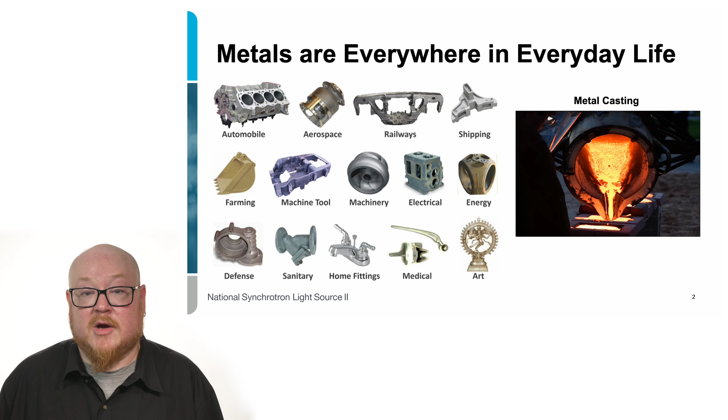Nowadays, we can do much more complex shaping and forming using the process of additive manufacturing, which is more commonly known as 3D printing. So you can form very complicated and very specific shapes and sizes of metal products.

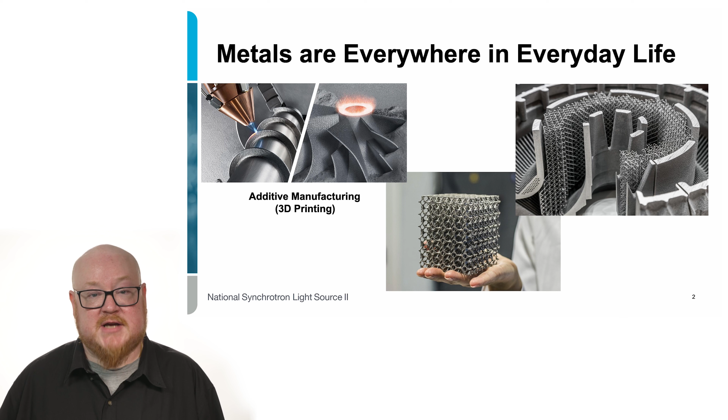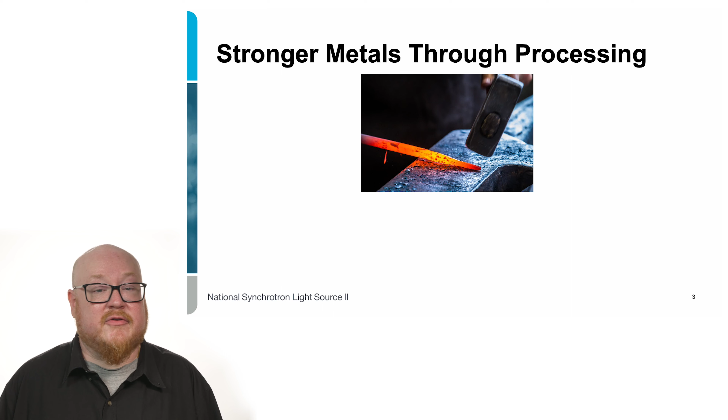But sometimes we want metals that are stronger or fit a particular purpose, and in this case, we need to do some processing to the metals. One of the most common processes for metals that people would be familiar with is forging. The examples go far back in time to the blacksmiths that used to make nails, spikes, and horseshoes and things like that. They're also used in very industrial processes today, which you can see at the bottom left here, where we're forming a large building ballast that's actually going to support the weight of a large skyscraper.

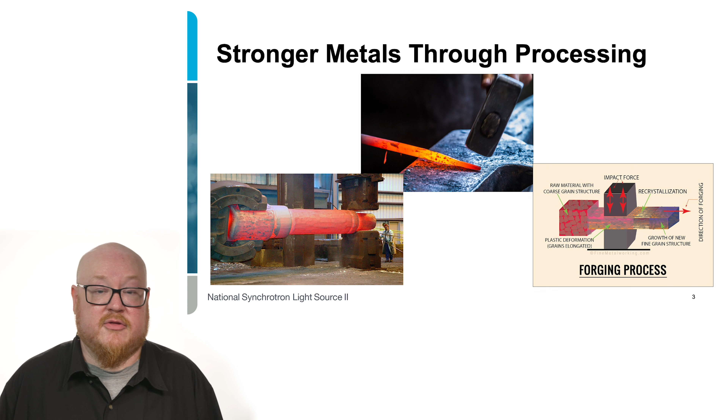The process of forging basically takes your raw hot metal material and has an impact force that not only shapes it, but also works to recrystallize the material and strengthen it in a particular direction that is beneficial to what you want that metal to be able to do.

Obviously, it's very important that this process is optimized in order to be reproducible, because if we're going to form something like a nail, or in the case of a building ballast, you want to make sure that it has high strength, and you want to make sure that whatever you do to it, you can reproduce multiple times so that it's the same every time.

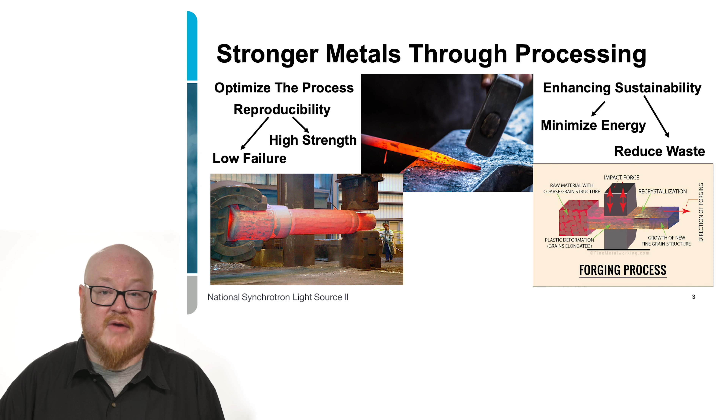You also want to make sure that it has a very low failure rate for the safety of the people who might be the occupants of that building. We also want to be able to enhance the sustainability of this forging process in order to minimize the amount of energy that it takes to make these pieces, and we also want to reduce the amount of waste that's produced during the processing of these metal pieces.

So the problem that we have is that we can see things before and after, but we can't observe what's going on while we're doing the forging process. We can't see the process itself, only the products after we've done the forging.

And this is where the synchrotron comes in. In particular, NSLS2 is an ideal place for studying this. The XPD, X-ray powder diffraction beamline at the NSLS2, has high flux, which means lots of X-rays, and those X-rays are very high energy. Both of these things are very important for being able to see through and study metal products.

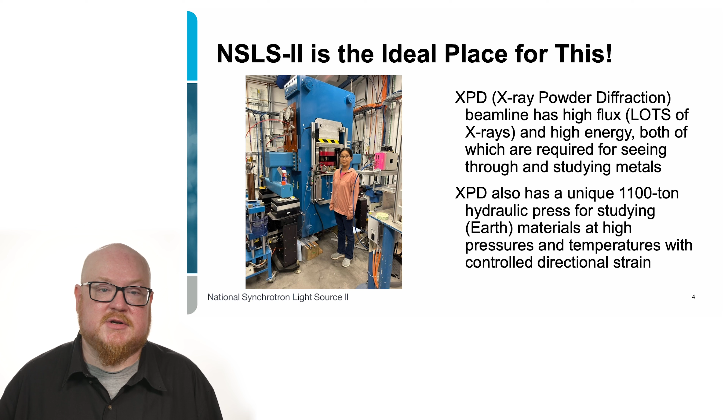In particular, XPD also has a unique 1,100-ton hydraulic press that's designed for studying materials, primarily earth materials, but many other materials as well, at high pressures and temperatures. And we can also control directional strain, which I'll get to in just a moment.

So to talk a little bit about pressure in relatable terms, pressure is basically just force divided by area. So if you have a block that's a particular weight and you lay it flat, it has less pressure exerted on the ground than if you stand it up on its end. It's the same force, but it's a different area, and that leads to a different pressure.

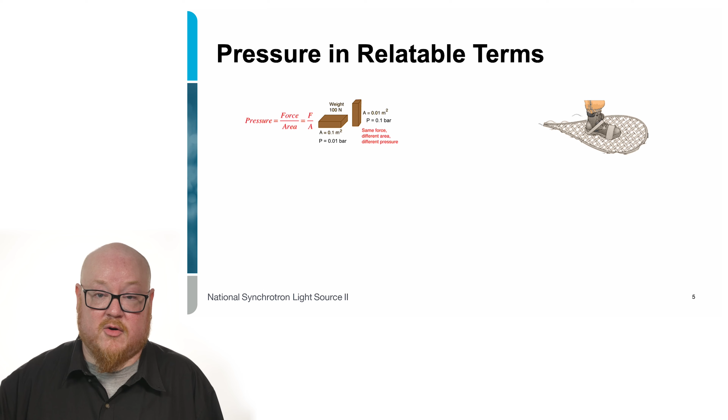That's the reason that we wear snowshoes in the winter, so that we can distribute our weight more evenly across the surface of the snow and we don't break through. On the other hand, a 100-pound woman in stiletto heels exerts 20 times more pressure on the ground than a 6,000-pound elephant. So it's the opposite of the snowshoe effect.

This is exactly why I stopped wearing stilettos. That and the difficulty in finding them in size 16 also played a role in that.

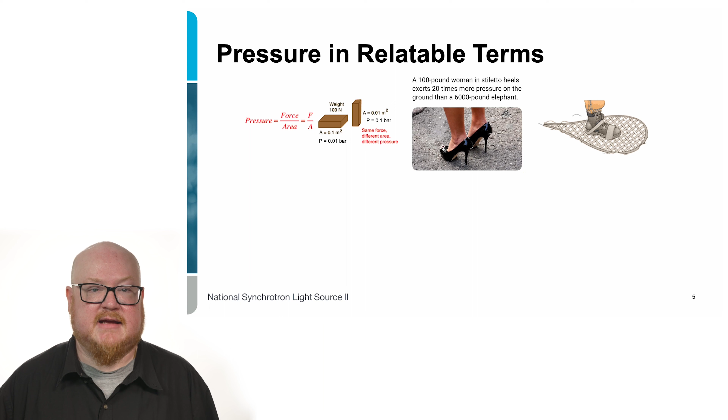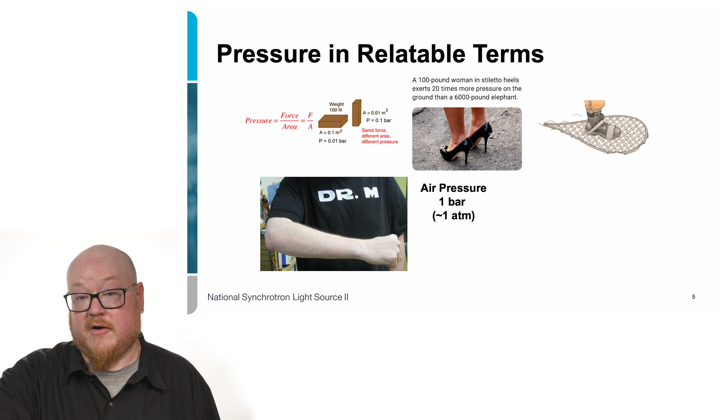But anyway, so to talk a little bit more about pressure, if you hold your arm out in front of you, the air pressure that you feel right now is 1 bar, about 1 atmosphere of pressure. And if you take your other hand and give your arm a tight squeeze, you're only adding less than half a bar of pressure.

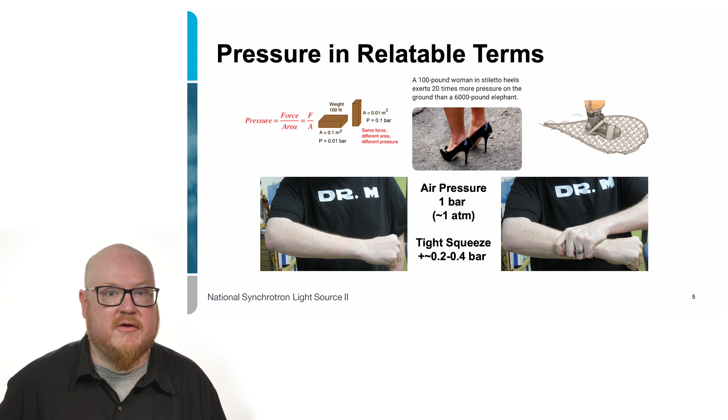Not even 50% more than the pressure you're feeling automatically just being in the room. If you were to, let's not go with Hulk Hogan, he's kind of dated, but if you take a bear hug from The Rock, you're adding about 5 to 7 bars of pressure, so now you're about 7 times atmospheric pressure.

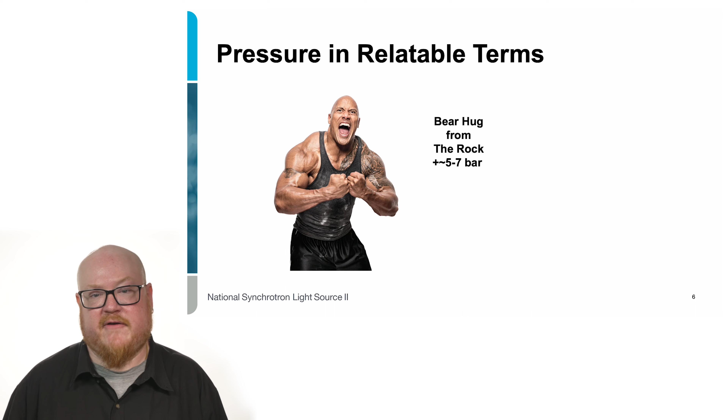And if Bruce Lee were still around and you did something to make him mad and he kicked you in the face, you would be experiencing 25 to 30 bars of pressure. It only takes 12 bars to break bones, so that's pretty serious.

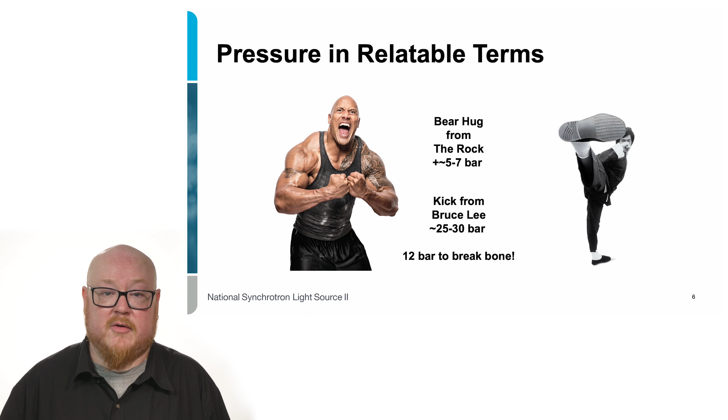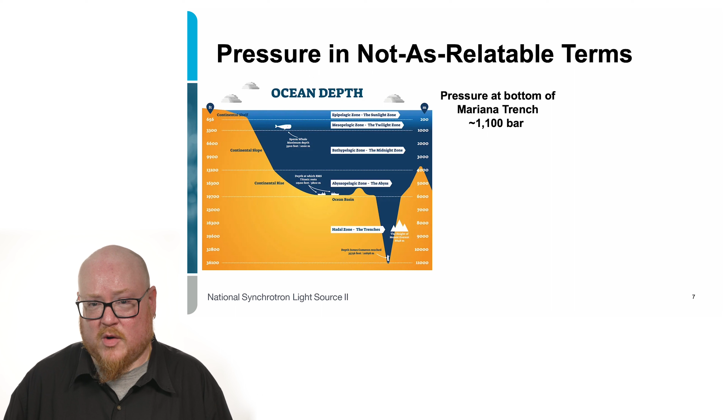Now I'm going to move ahead and talk about pressure in not quite as relatable terms. If we go as deep as we can on Earth, to the deepest part of the ocean in the Mariana Trench, that's about 1,100 bars, or 1,100 times atmospheric pressure. The press that we have at the MAXPD beamline is able to achieve pressures that are about 250,000 times atmospheric pressure. So there's a very big range of conditions that we can cover.

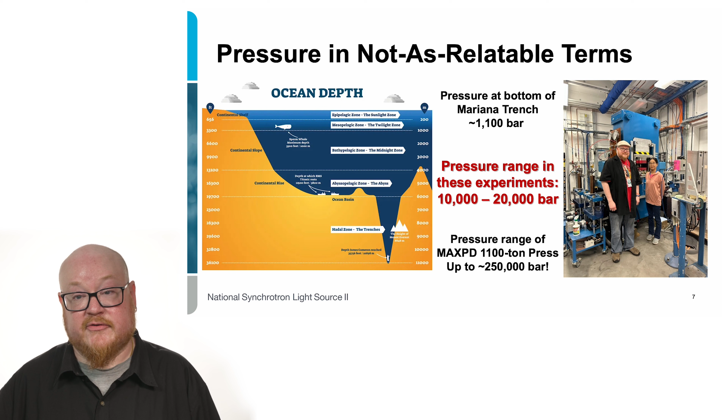In particular, the experiments I'm going to talk about today were in the pressure range from 10,000 to 20,000 bars. So to look at the experiment schematic for the high pressure experiment...

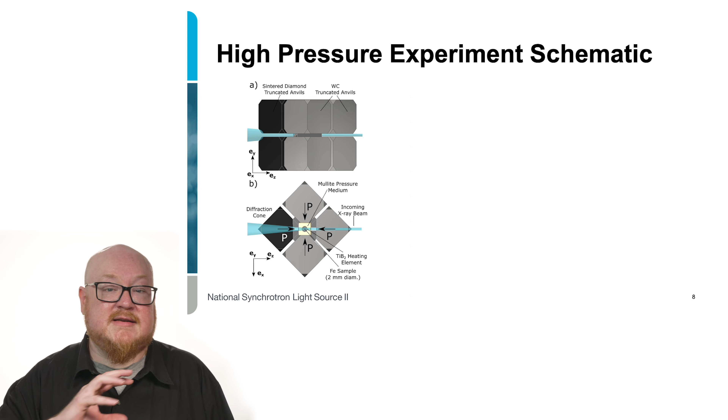We then take these anvils and put them in the press, and the press pushes up from below in order to raise the pressure on the sample. We have the unique ability in this design to drive the top and bottom anvils separately in order to add a deformation field of strain on the sample itself. That becomes important, particularly when we're looking at forging processes.

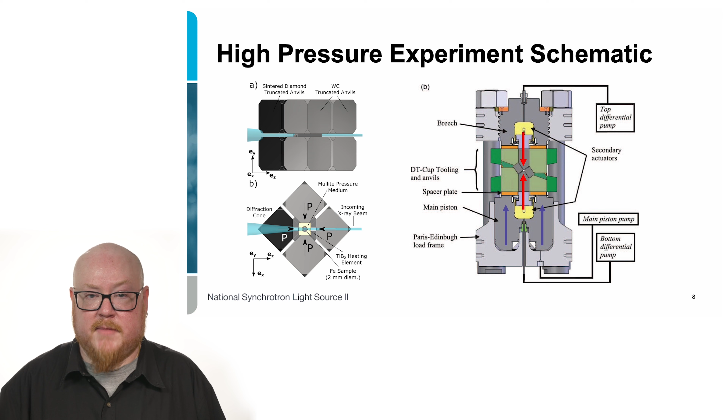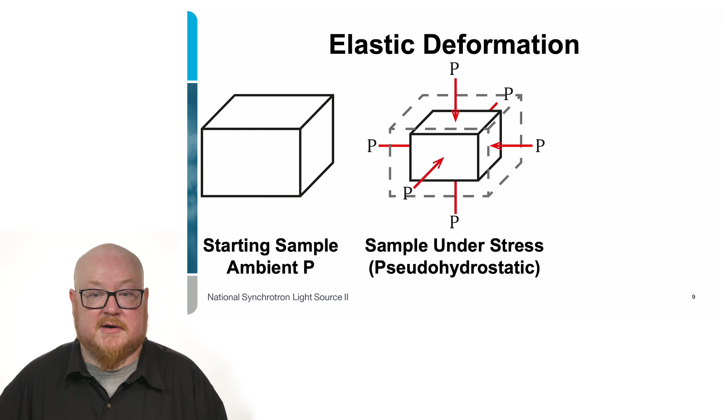So let's talk a little about why we want to look at something like this. In elastic deformation, your sample starts at room conditions, say room temperature and room pressure, and then you add pressure to it. The sample, under stress that is the same in all directions, will become smaller, which is exactly what you'd expect. Then when you release that pressure, the sample reverts to its original shape and size.

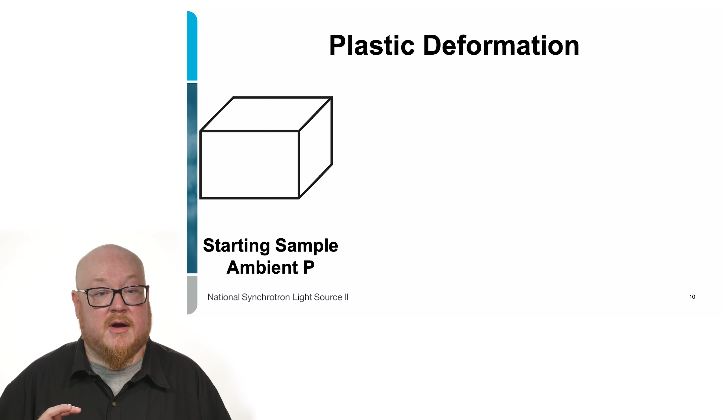However, in plastic deformation, which is what occurs during these forging processes, we start with the sample at ambient pressure, and then put it under pressure, but it's not the same in all directions. Once we release that pressure, the sample is changed in shape and properties from what it was before we put it under those plastic deformation conditions.

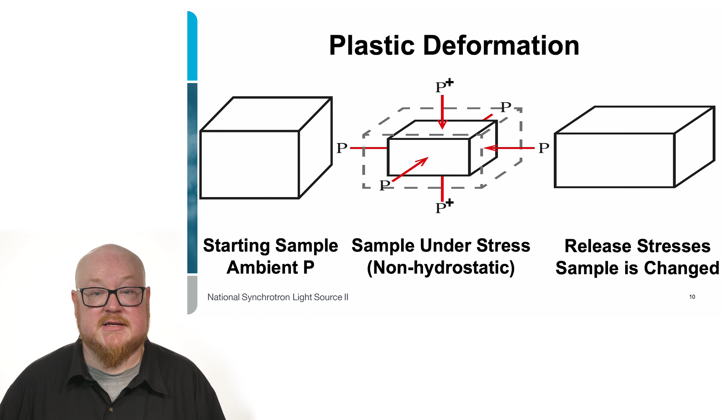The incoming X-ray beam hits your sample, and we can use what's called a scintillator, just a fancy word for a crystal that lights up when X-rays hit it. We use that to take images directly of the sample while it's at high pressure and temperature. There's also a large panel area detector behind it that allows us to collect the X-ray diffraction data, which we'll talk about in just a moment.

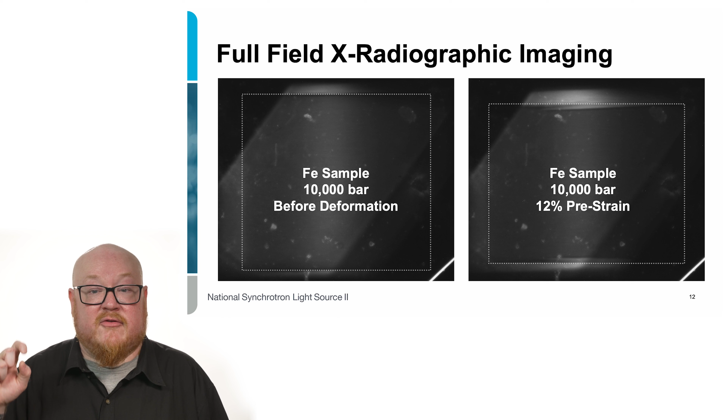But first, the X-radiographic imaging is what I want to talk about. This is a picture of our iron sample at 10,000 bars before we did any of the deformation to it. It can be a little difficult to see if you're not familiar with looking at this, so what you're looking for is in this box right here, that's the iron sample. Then we pre-strain the sample by adding that deformation field in the particular direction we talked about earlier, and we can see the iron sample at 10,000 bars with 12% pre-strain.

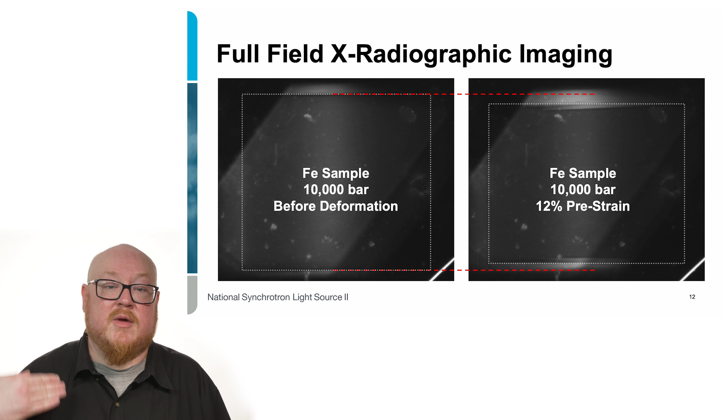You can see clearly that the sample has changed its length, and this is what we measure in order to determine what next steps to take during the experiment. Now, to talk a little bit about the X-ray diffraction, what it shows us is the different crystals that are in the iron sample at high pressure.

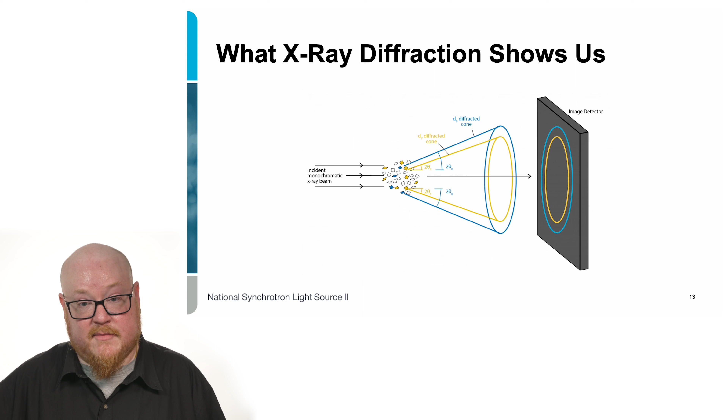When the X-ray beam goes in, it hits all of the different crystals, and the X-rays are scattered in these cone shapes that are then collected on the image detector to the right. We can actually see some of the data in a moment.

What you're going to be looking for in these experiments, just as we talked about before, is when we have a sample at ambient conditions, room pressure, room temperature, and 1 bar, we stick it into the press, collect the X-ray diffraction, and see rings that look very similar to the ones shown in this diagram.

Now we're going to add some pressure, so we're going to make the sample smaller. We're at 10,000 bars now, and that causes the rings to get a little bit bigger.

Now, once we add that deformation field, those rings that started out as nice perfect circles at 10,000 bars, once they've been deformed a little bit, expand into ellipses. They're no longer perfect circles, and the sample is no longer the same shape as it was before we started.

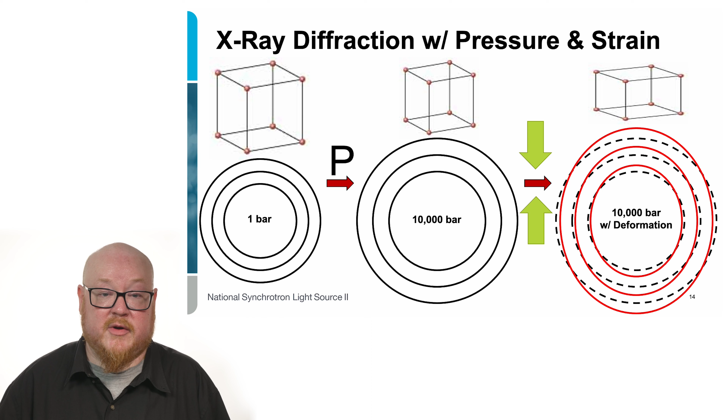This is very difficult to see with the naked eye, so I'm going to show you something that's a little bit clearer in just a moment.

So we are able to see exactly what is going on in these processes, and we're able to replicate what occurs during the forging process.

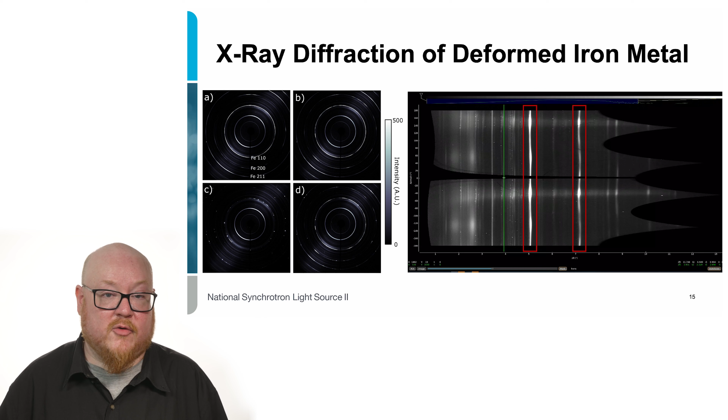Going back to the original reason for all of this, the problem was we couldn't see anything but before and after. And we have had success: we can observe these processes as they occur at high pressure, high temperature, and with directional strain.

We can repeatedly reproduce these pressure, temperature, and strain conditions that are found in forging, and some of the textures that we observe in the finished products in real life. So we know, based on what we're seeing afterwards, that we're able to replicate what's going on in these materials, which is really, really important.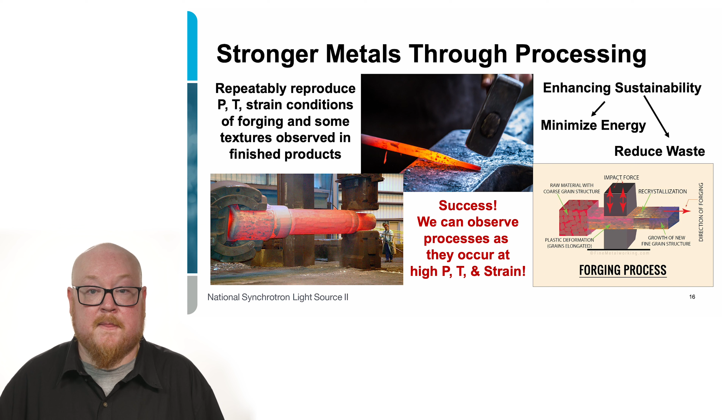And we found that grain growth tends to be faster and easier at lower pressures and higher temperatures, and the recrystallization process is a bit slower at high pressure with lower temperature.

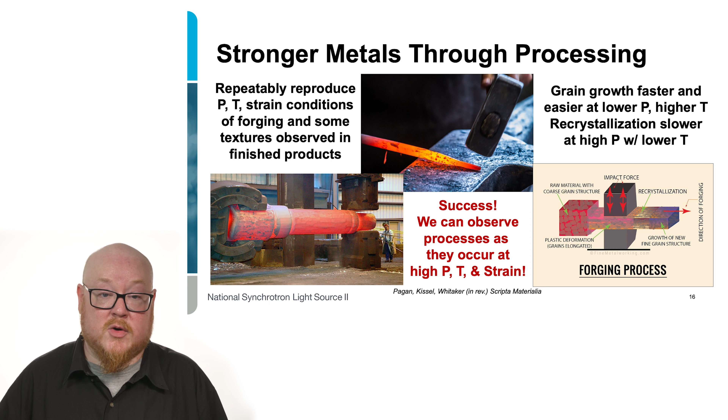And the great thing about this is that it's only the beginning of the study. We have so many more things to do where we can determine other conditions of forging, and we can also look at different processes of metal formation, such as metal rolling, where we take a larger metal and roll it into a sheet.

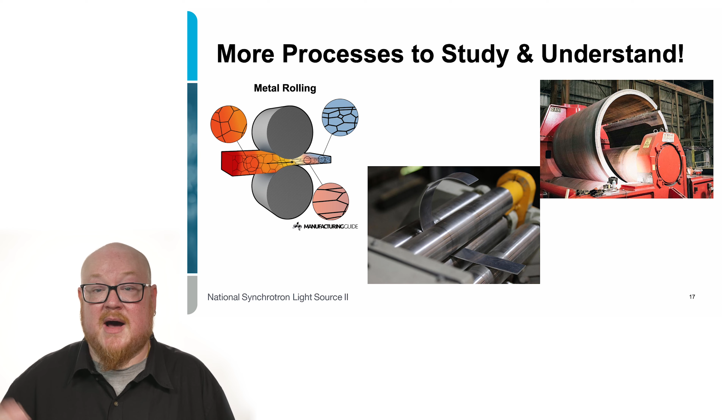And we can also begin to understand the extrusion process, where metal is forced through a die. At that die interface, there are very high pressures and temperatures experienced, and we are able to replicate those at the NSLS2. So this is a very exciting field that we're hoping to continue looking into.